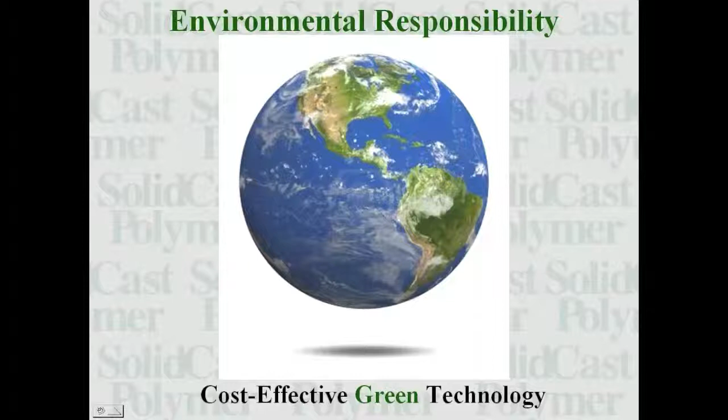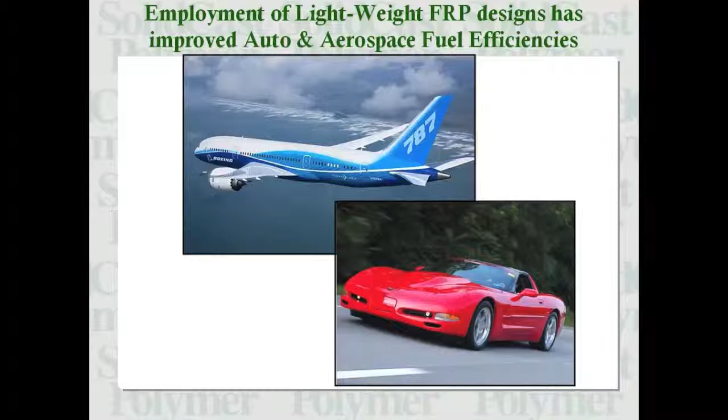In the past decade or so, there has been significant focus on caring for and cleaning up our environment. Government agencies are mandating more stringent regulations on major issues like air emissions and fuel efficiencies. Our composites industry has contributed much to helping meet our lofty environmental goals. The employment of lightweight FRP designs has greatly improved both automobile and aerospace industry fuel efficiencies, while giving rise to an eco-friendly wind energy market. And I'd like to note that these industries have benefited greatly from the growth of carbon fiber technology, for example, the Boeing 787 Dreamliner.

Ironically, these same FRP materials offering countless energy and environmental benefits have looming issues regarding disposal and reclamation. It's estimated that the global fiberglass output will exceed 4.8 million tons by the end of 2013. It's also projected that of that 4.8 million tons, approximately 400,000 tons of composite waste will be generated from manufacturing processes. And these estimates don't include existing FRP products reaching their life expectancy and design limitations.

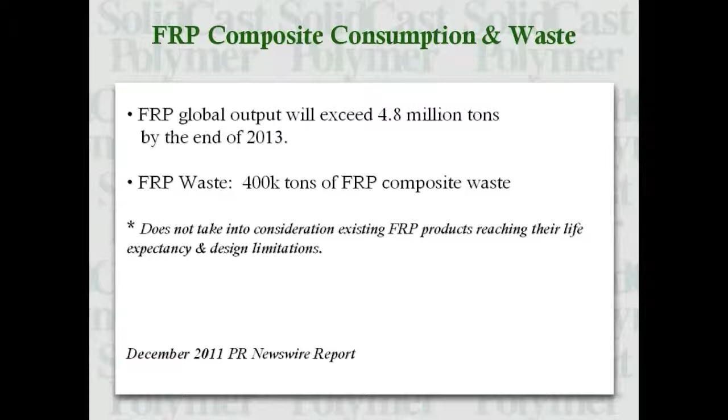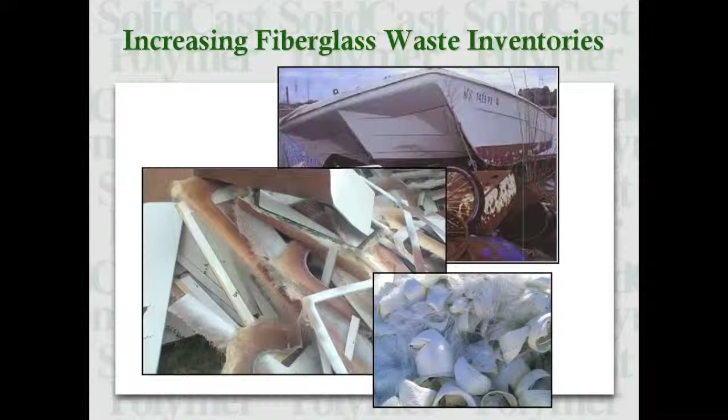Faced with growing sustainability concerns regarding increased hazardous landfill costs and overburdening waste fiberglass inventories, FRP manufacturers are looking to recycling and reclamation as a solution. As in the development of all new and progressive technologies, the greatest driver or motivation for recycling FRP will always be cost. For example, there are disposal costs, which include transportation and landfill expenses, and opportunity costs, which are scrap materials that could have been used to produce saleable products.

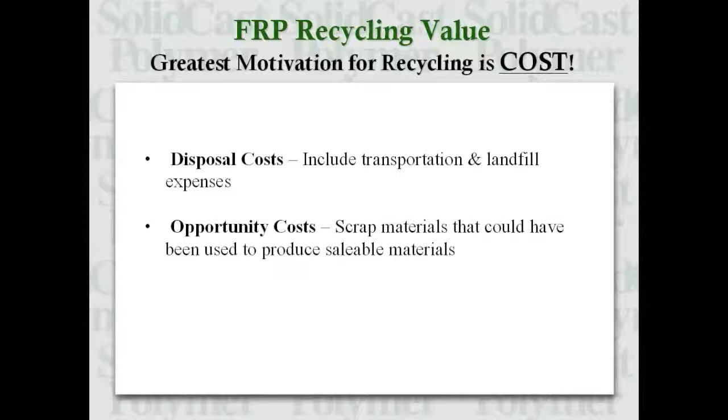Presently, the three most common types of FRP recycling processes are mechanical shredding, incineration, and reclamation harvesting. The mechanical shredding method produces inconsistent reclaimed fiber sizes, resulting in inconsistent physical properties, while incineration is a very expensive process with high capital equipment costs. While this process burns off resin, it also degrades physical properties of the fiber.

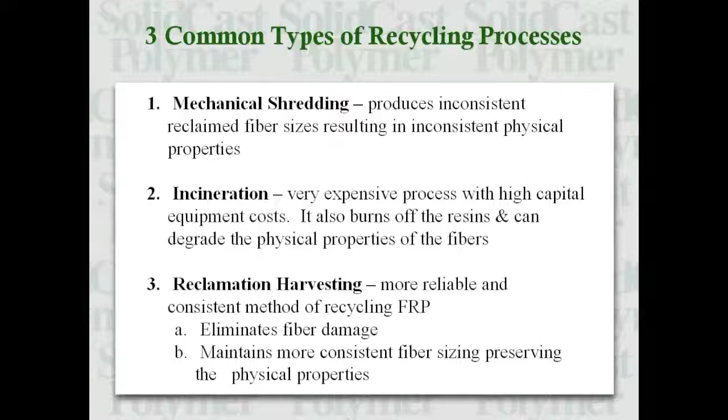Reclamation harvesting, on the other hand, is a more reliable and consistent method of recycling FRP. It eliminates damages to the fibers from extreme temperatures and maintains more consistent sizing, which helps preserve the fiber's original physical properties. With respect to reprocessing and reusing recycled FRP, reclamation harvesting seems the most viable process. The big question is, what do you do with the fibers once they've been harvested?

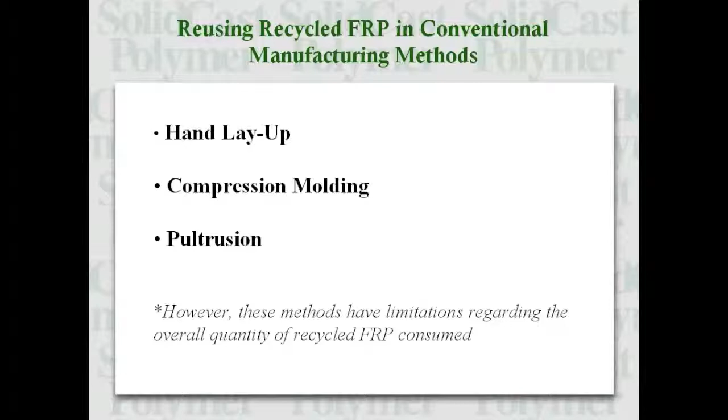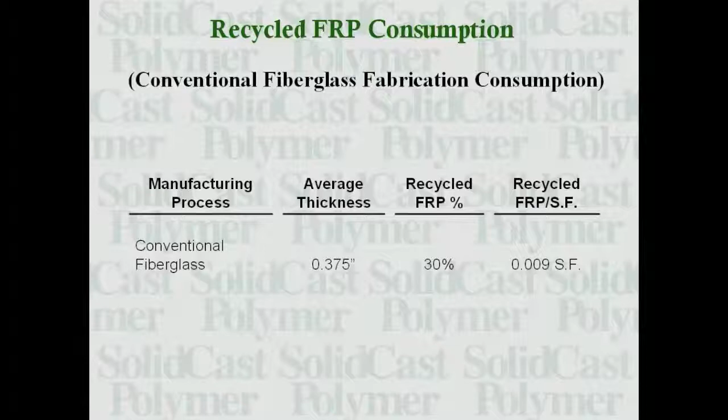Presently, recycled FRP can be reused in various fiberglass manufacturing processes such as hand layup, compression molding, and pultrusion, just to mention a few. However, these methods have limitations regarding the volume of recycled FRP consumed, as conventional fiberglass methods consume relatively small volumes of recycled FRP.

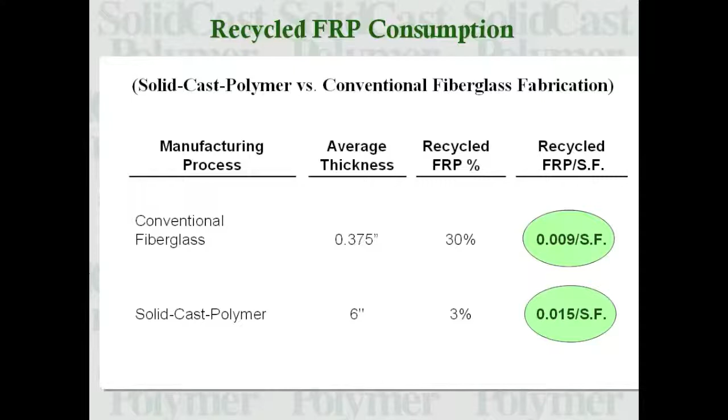One economical and effective method of consuming large volumes of waste FRP is to exploit the reclamation harvesting method and incorporate reclaimed fibers into Solid-Cast-Polymer composite systems. This slide illustrates that conventional fiberglass components consume a greater percentage of recycled FRP waste than does solid-cast polymer. However, based on a similar square area, solid-cast polymer products consume a greater volume of recycled FRP because it's typically produced in greater thicknesses.

So what is a solid-cast polymer composite system? Solid-cast polymer, or SCP as we refer to it, is an advanced composite material of construction that exhibits superior physical properties, corrosion resistance, and a multitude of other features and benefits. However, one of its most important qualities is its environmental value.

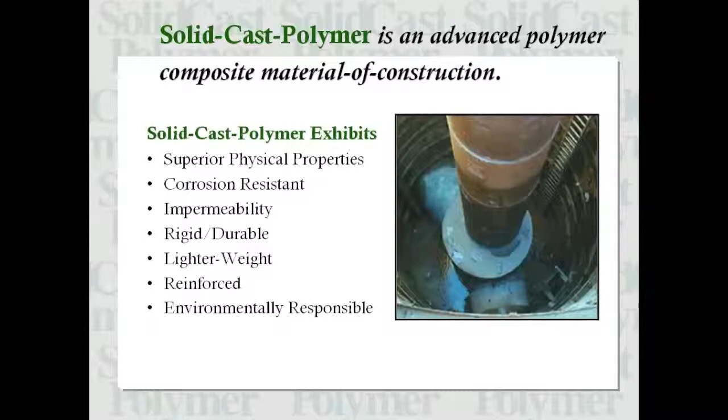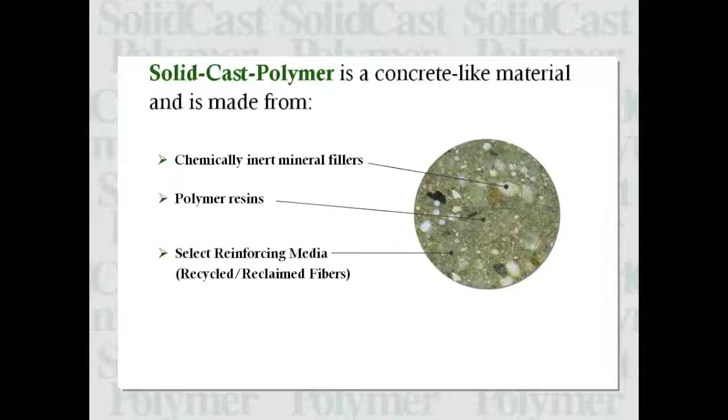Solid-cast polymer, or SCP, is a concrete-like material made from chemically inert mineral fillers such as quartz and silica sand, thermosetting polymer resins, and select reinforcing media in the form of recycled FRP fibers. Other than the silica quartz-based aggregates, which make up approximately 90% of the SCP, two key components in the solid-cast polymer matrix are the resin and recycled FRP.

The SCP resin is a patented environmentally responsible thermosetting resin that does not contain volatile organic compounds or hazardous air pollutants. It's highly productive as it initiates faster curing, which increases output, and this resin system is non-flammable.

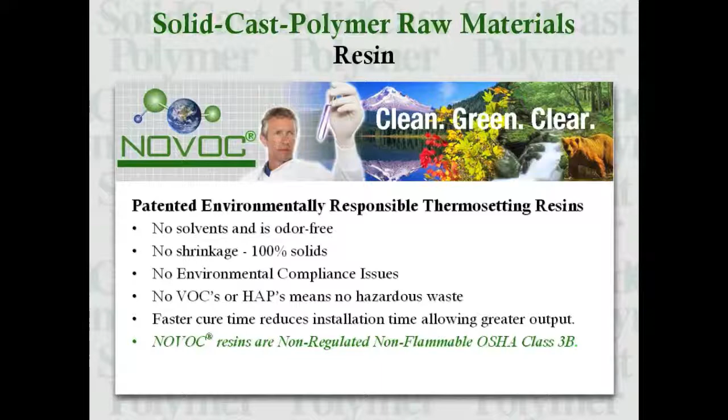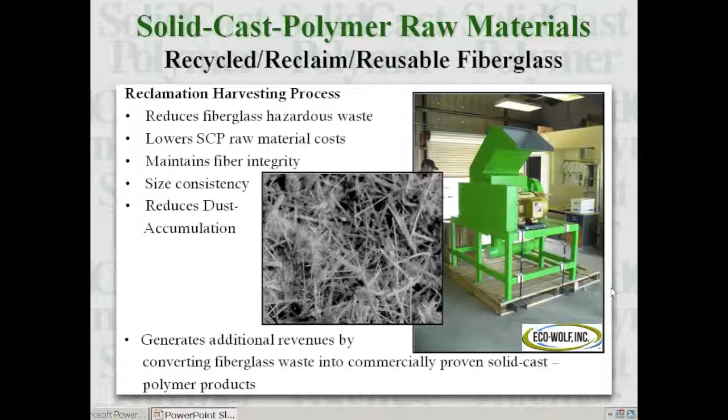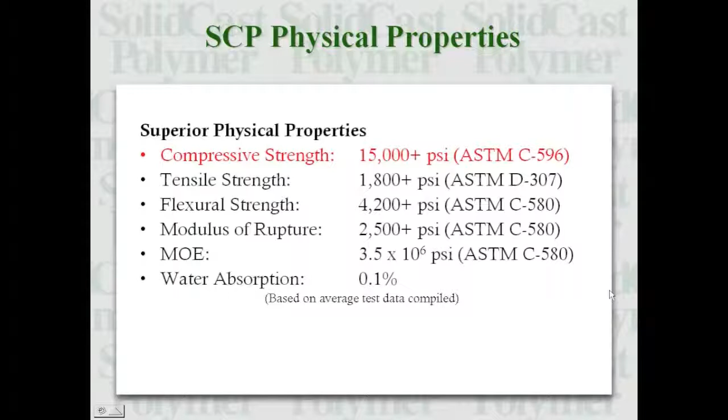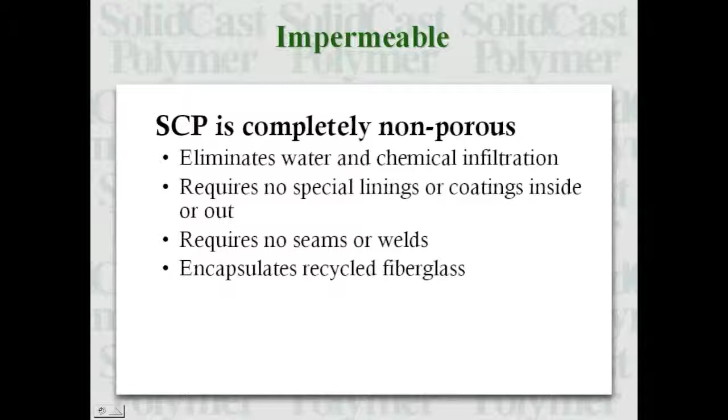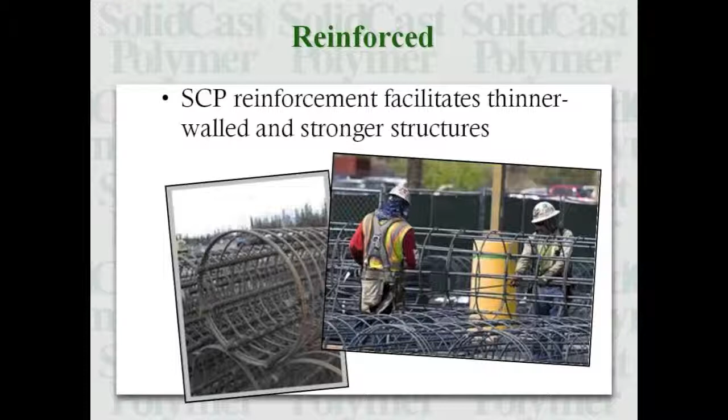The FRP reclamation harvesting process not only helps reduce fiberglass waste, it lowers overall SCP raw material costs while maintaining fiber integrity and size consistency. More importantly, this process helps generate revenues by converting fiberglass waste into commercially proven solid-cast polymer products. Solid-cast polymer exhibits superior physical properties. For example, Portland cement concrete has a compressive strength of approximately 3,000 to 5,000 psi. Solid-cast polymer is completely corrosion resistant through and through versus Portland cement concrete, which needs thin liners and protective coatings. SCP is virtually impermeable while completely encapsulating the hazardous waste FRP fibers and resin. SCP is rigid, durable, and resilient, and can be reinforced with various materials such as rebar, which facilitates lighter weight and stronger structures.

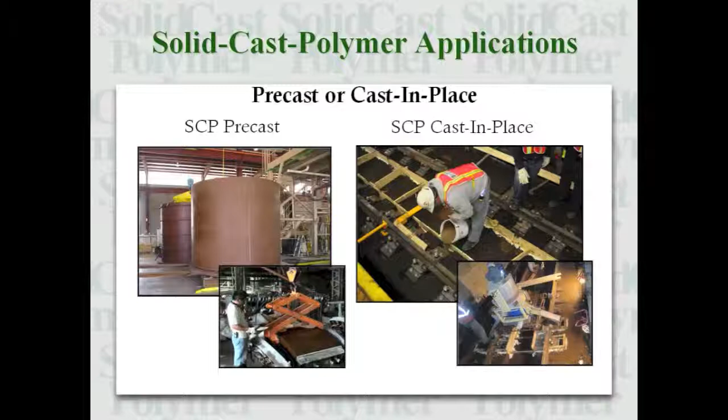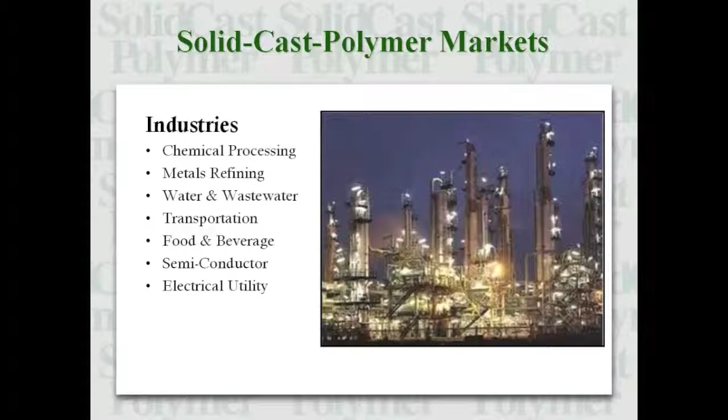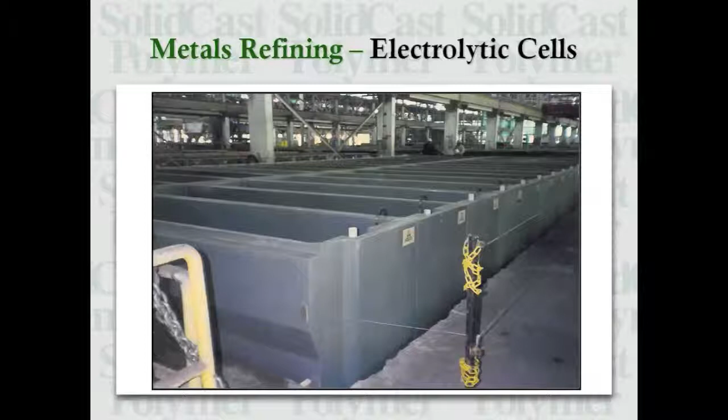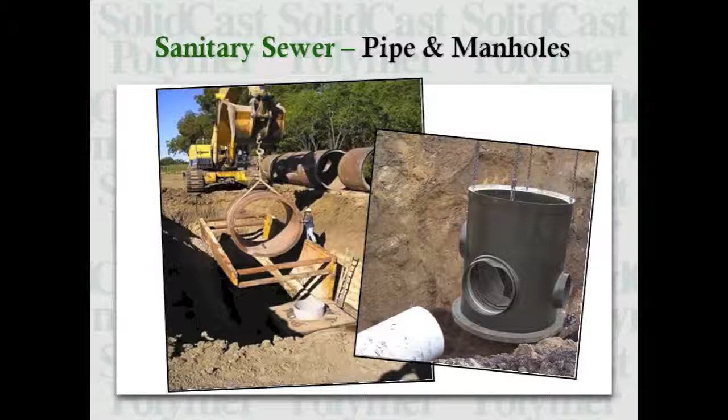Solid-cast polymer products are installed using two basic methods of construction: precast or cast in place. SCP products also have a broad market appeal, as these systems have been used in one form or another for over 30 years. SCP products can be used to contain corrosive chemicals like acids and caustics. They can be used in the refining of basic metals such as copper and zinc. But to date, its strongest market appeal has been in the sanitary sewer market, providing large diameter pipe, manhole structures, and tunnel lining systems.

Still, a key and emerging solid cast polymer market is transportation and the replacement of creosoted wood and Portland cement concrete railroad ties. In this application, SCP demonstrates great strength, durability, and wear resistance.

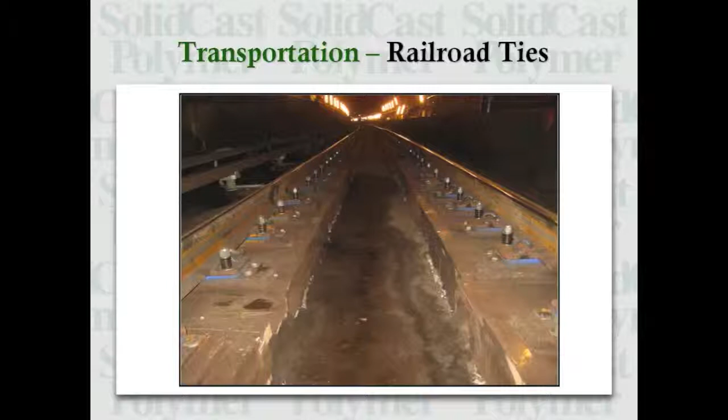Solid-Cast Polymer has many features and benefits, but as it relates to the utilization of recycled FRP, its greatest benefit is its consumption of large volumes of waste FRP. This slide illustrates the volume of solid-cast polymer and recycled FRP used in a 1 mile span of 2 separate solid-cast polymer projects. As you can see, SCP can consume vast quantities of recycled FRP.

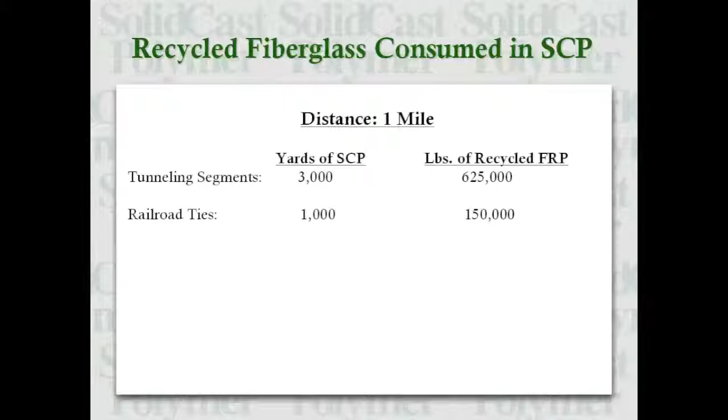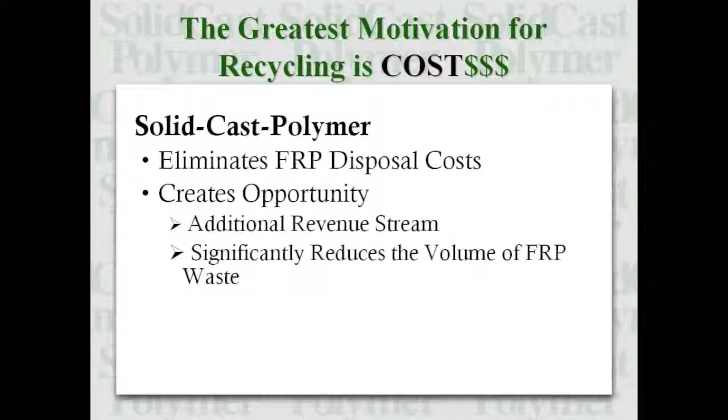Remembering that the greatest motivation for recycling is cost, we conclude that solid-cast polymer is emerging as a significant cost-effective alternative technology for recycled FRP, while always remaining environmentally responsible.